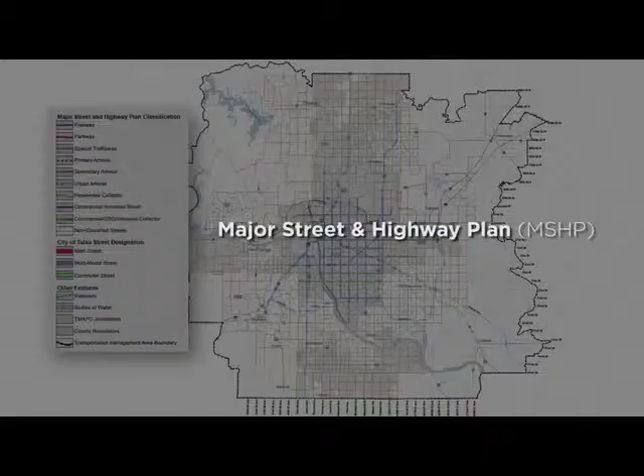Tulsa's current project development process formally begins with a project being identified and funded. Once funded, the design process is fairly straightforward, where design phases follow a 30, 60, 90, and 100% completion. The major street and highway plan establishes the street hierarchy and associated possible cross-sections, with right-of-ways indicated. Tulsa has developed a new project development process that bridges the gap between long-range planning and final engineering. The Complete Streets Procedural Manual provides the city with the needed tools and procedures to make this transition seamless.

Historically, transportation infrastructure has been designed, funded, and maintained to react to existing congestion by adding capacity. Experience across the country has shown the shortcomings of this approach, which relies on taxes and bonds to fund the infrastructure required by projected travel demands.

Changing this approach is at the core of infrastructure reform initiatives at the national and local level. In short, the public sector can no longer depend on consistently raising the substantial funds required to build its way out of the present, let alone future congestion. Building better roads along with real alternatives to driving can change the problematic patterns that impair communities' quality of life. Congestion is just the most visible symptom of the underlying problems.

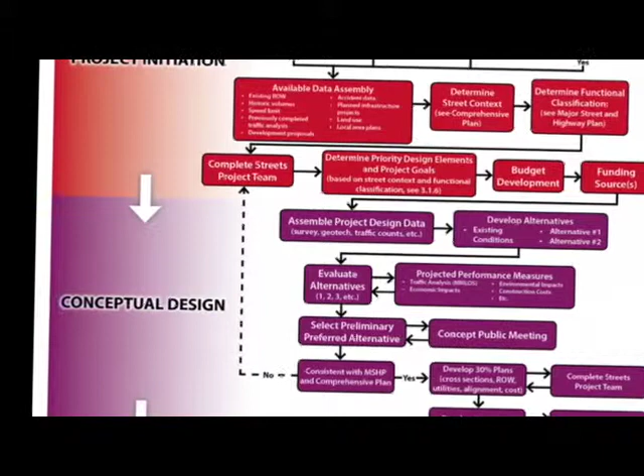The updated Complete Streets design and implementation process is outlined in Chapter 3 of the CS Procedural Manual. A useful flowchart graphic, Figure 3.1, has been provided that walks through the many necessary steps to achieve the most desired result. This graphic illustrates the process starting with a proposed project at the project initiation stage, culminating with the coordination of a multidisciplinary project team.

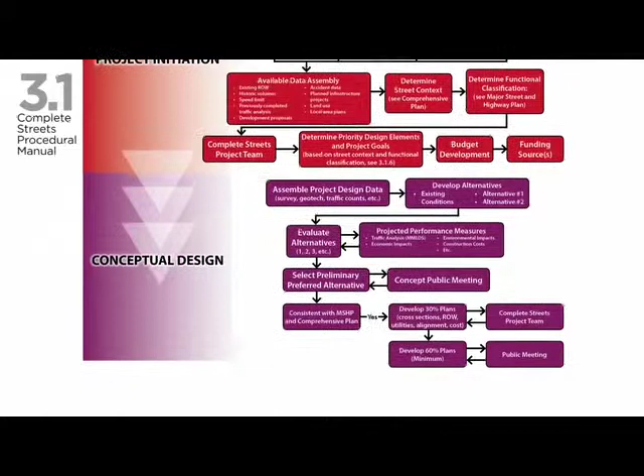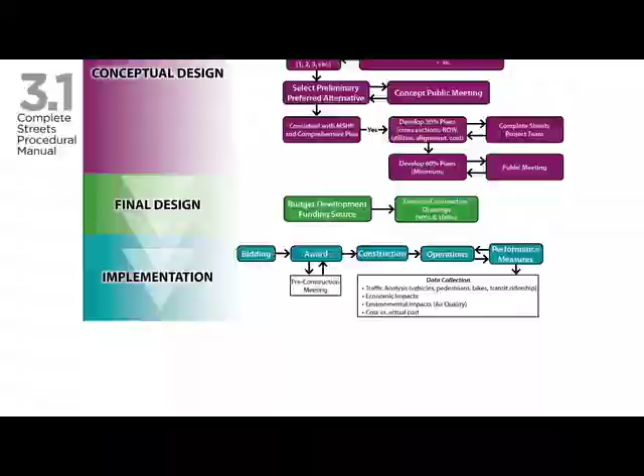Street design alternatives are developed and evaluated during the conceptual design phase, and with proper public input, this leads to a final design phase. With funding and complete construction plans in place, the process moves to the implementation stage. After the implementation of a complete street design, performance measures are used to provide further evaluation.

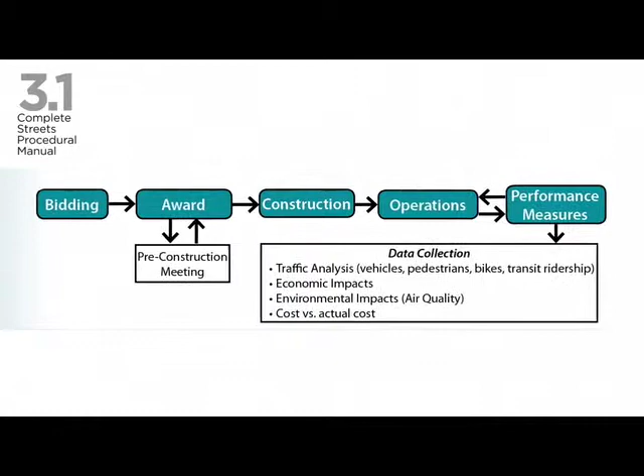The first step is the project initiation stage. Complete streets projects arise in two basic ways, either initiated because of needed street work or initiated by private development projects. A project should first be identified as either a utility-related project, a private development project, a capital project, or a minor maintenance project. While there are similarities in how these projects are conducted, the initiation and planning processes are different.

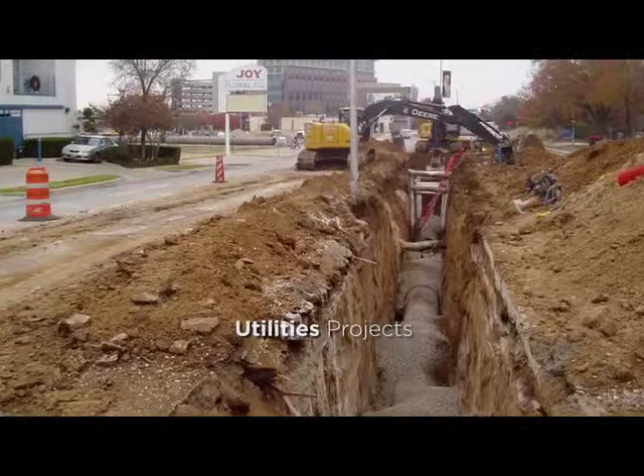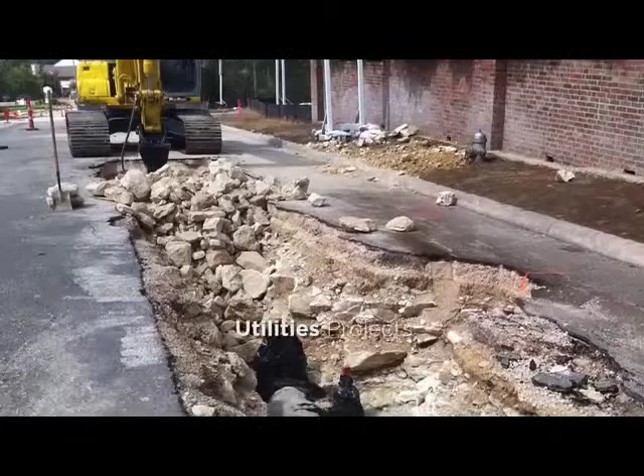For instance, a utility-related project initiated to replace water, sewer, or utility lines may be considered as an opportunity to introduce complete streets elements if the project length is significant. A 30-foot-long mid-block replacement of a water valve would not be a viable candidate, but a 3-block-long sanitary sewer line replacement would likely create a positive opportunity to add complete streets elements.

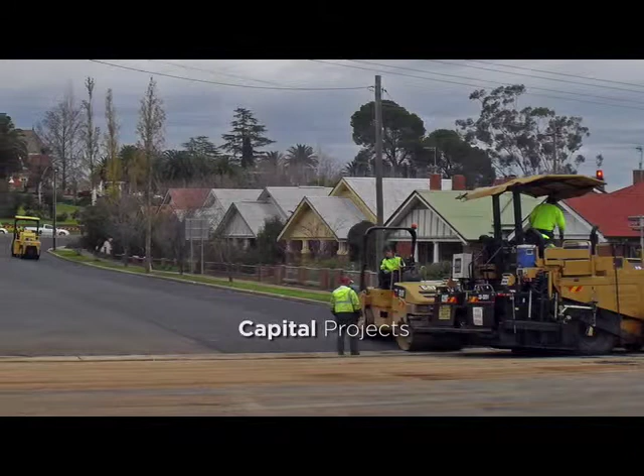In the case of private development projects, whoever initiates and sponsors a complete street project determines the initial review and approval process by the City of Tulsa. Some projects may have matching funds from state, federal, or local sources, while others are funded 100% by the private sector. Capital projects are roadway and reconstruction projects that are typically placed on the city's capital improvement plan. The scope of these projects is usually large enough to allow for consideration of planning and potential implementation of complete streets elements.

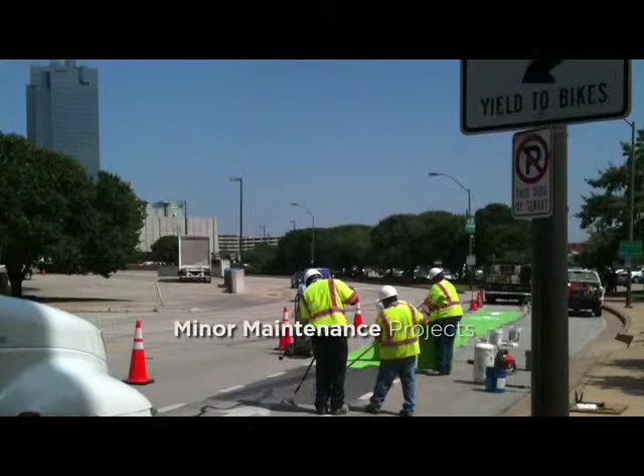Finally, minor maintenance projects such as restriping or resurfacing roadways should be evaluated as opportunities to introduce certain complete streets elements. Since these maintenance plans can be sporadic based on roadway conditions, they may not be appropriate for full complete streets projects, but can still be instances to introduce planned bike facilities or new multimodal features.

After determining the type of project, all available data should be assembled to best inform the street design process. This should include both traditional thoroughfare data as well as information about the contextual environment. Designers of complete streets must balance roadway characteristics, the context and land use of an area, priority design elements, and the construction, operation, and maintenance costs associated with the improvements.

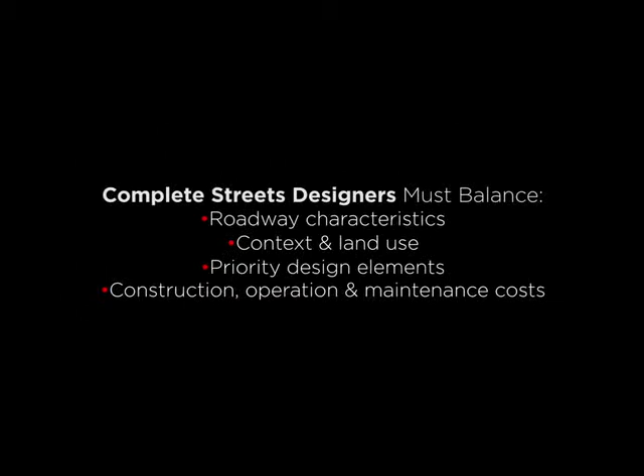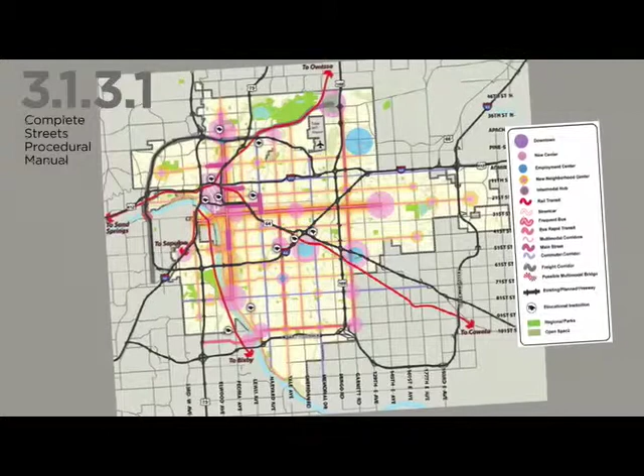The street context can be determined by referring to the comprehensive plan vision map as well as evaluating local area plans, existing land uses, existing zoning, and development proposals. The vision map is provided in Figure 3.1.3.1 in the manual. The Major Streets and Highway Plan, the MSHP, should be used to define the correct functional classification. The most current MSHP can be found on the INCOG website.

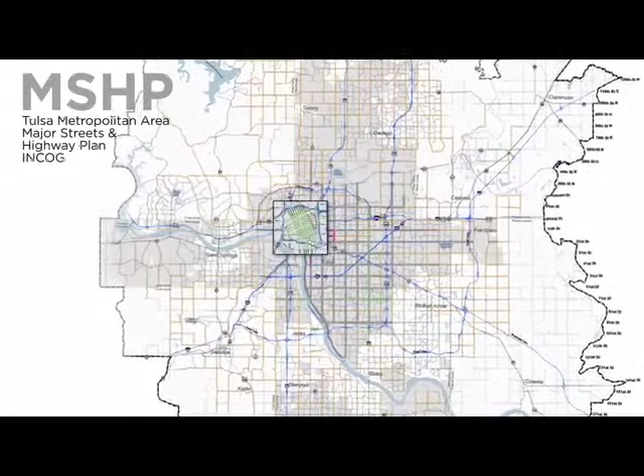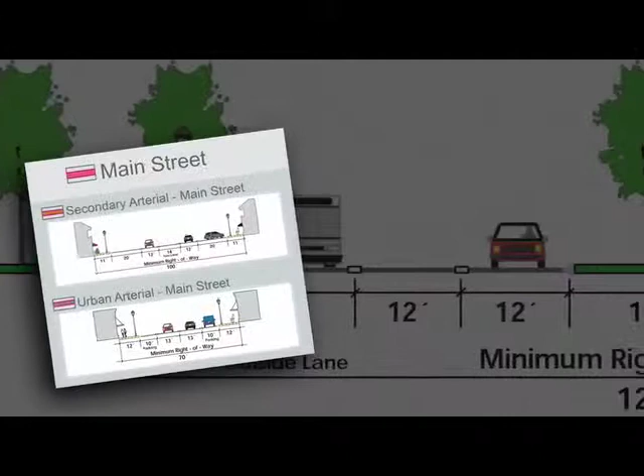The City of Tulsa has worked with INCOG to integrate the street design concepts from the comprehensive plan into the Major Streets and Highway Plan and has designated a series of context street types into their adopted plan: main streets, multimodal streets, and commuter streets. Each street designation implies an overarching vision and character that should be considered when planning specific projects.

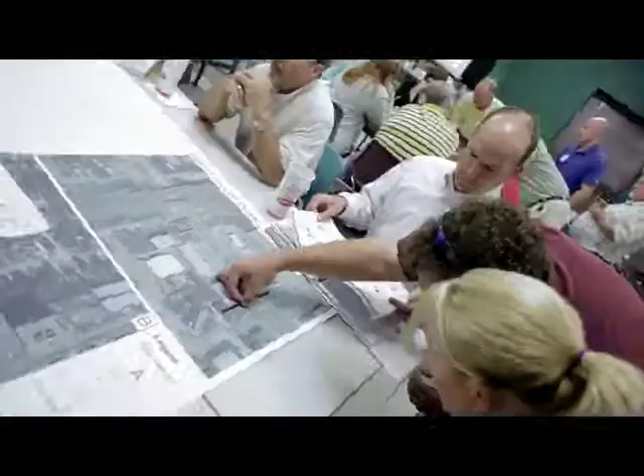A coordination kickoff meeting is necessary to establish the scope of each complete street project and to form a project team involving all appropriate departments early in the project development process. This meeting will be an opportunity to present all team members the street context, functional classification, and initial data, as well as determine project goals and priority design elements.

The design guidance of the CS Manual provides options for street designs in the form of best practices of geometric and furnishing treatments, but in most cases it does not prescribe which specific treatments must be used in which combination.

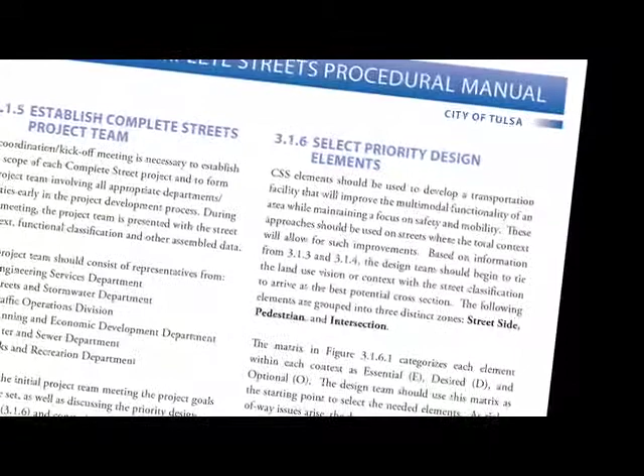It also does not dictate which treatment should receive priority when there is a conflict between design alternatives. Rather, it gives users the flexibility to determine which overall design is most appropriate and practical in light of the goals and priorities established through the planning process and the overall policies of the manual.

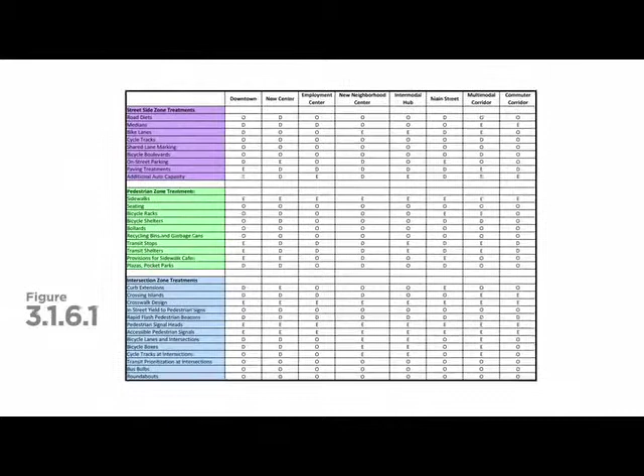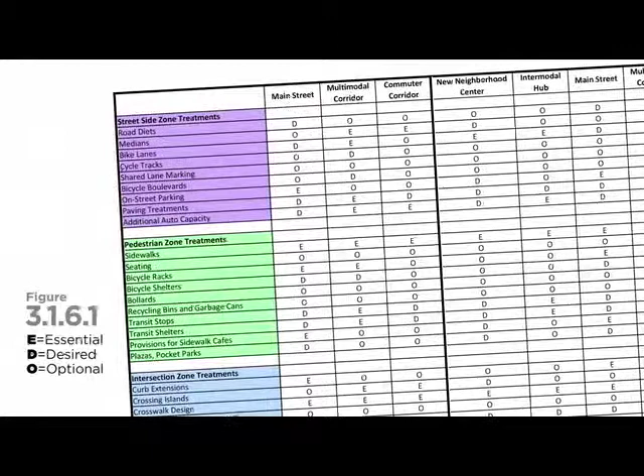A matrix is provided in the CS manual to assist in guiding the selection of each element based on street context. These elements are grouped into three distinct zones: street side, pedestrian, and intersection. The matrix in Figure 3.1.6.1 categorizes each design element within each context as either essential, desired, or optional. The design team should use this matrix as the starting point to select the needed elements. For example, medians and crossing islands are considered essential for a multimodal corridor, but are optional elements for a main street. Further guidance on specific design elements is provided in Appendix A.

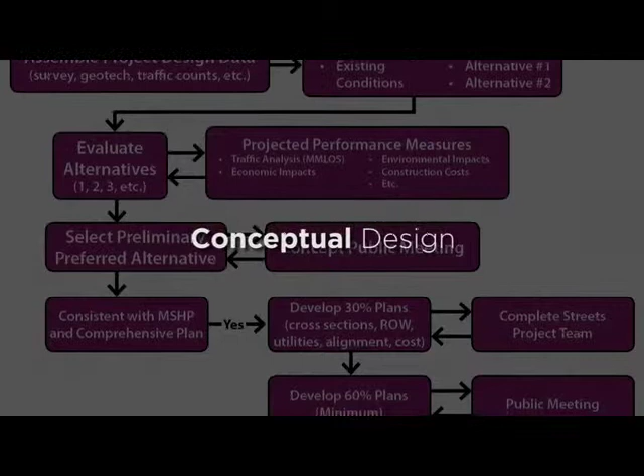Once the priority elements have been chosen, the process leads to conceptually detailing the thoroughfare design. As with any design process, this stage is iterative, can involve several options, and can result in potential updates to the thoroughfare plan and cross-sections.

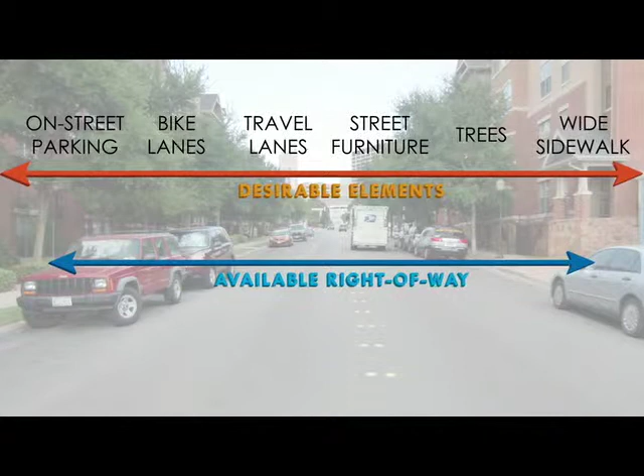First, identify available right-of-way and other constraints such as utilities, physical terrain, and access. In existing areas, an initial cross-section of the desirable street side and intersection elements is prepared and compared with the available right-of-way. If the total width of desirable design elements exceeds the right-of-way, determine the feasibility of acquiring the necessary right-of-way or eliminating or reducing non-vital elements. The design of the street side and pedestrian zones should then be completed based on the thoroughfare type and an understanding of the adjacent context characteristics.

The art of thoroughfare design is balancing the desired design elements of the thoroughfare with right-of-way constraints. Higher priority design elements are those that help the thoroughfare meet the vision and context-sensitive objectives of the community. When the width of the right-of-way varies or is constrained, it is useful to prioritize design elements and develop a series of cross-section options accommodating all or many of the higher priority elements.

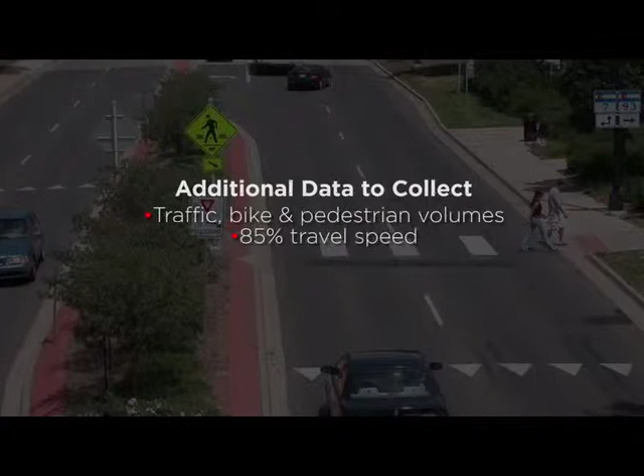Prior to conceptual design, additional data should be collected including current traffic, bike, pedestrian volumes, 85th percentile travel speed, survey including right-of-way occupants, and geotechnical analysis. Performance measures will help the design team evaluate the alternatives and project the effectiveness of the design elements in achieving the preferred results. Traditionally, vehicular level of service, a measure of traffic congestion, has been used for transportation planning for widening projects. However, Complete Streets project evaluation requires addressing how an alternative will serve all users.

Measures that can be used to evaluate alternatives and project performance include multimodal level of service analysis, economic impacts, and environmental impacts. MMLOS is a method for assessing how well an urban street serves the needs of all users: auto drivers, transit passengers, bicycle riders, and pedestrians. The result of the analysis is a perceived degree of satisfaction for each of the four users based on three basic travel movements: travel along the street segment between two signalized intersections, travel through the downstream intersection of that segment, and travel crossing the street.

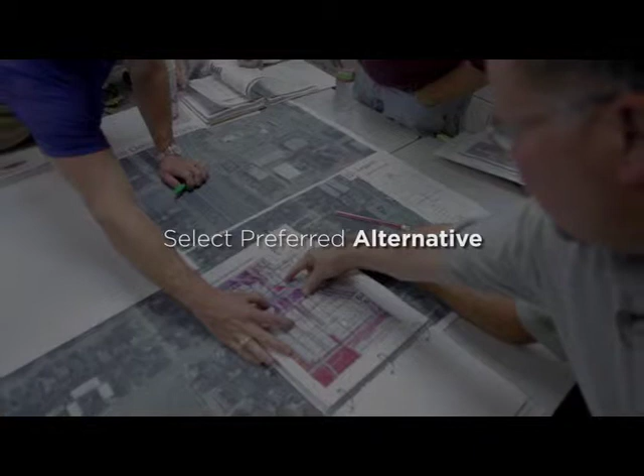The CS manual provides guidance for prioritizing design decisions for each road user based on the various street types. All of the developed alternatives are analyzed by the Complete Streets project team, comparing the various measures of performance. A selected preferred alternative can proceed to the final design stage if it is consistent with the MSHP and the comprehensive plan vision and does not have the additional requirements from federal funding inputs. The selected alternative is then further refined and given to the project team for final review.

If a desired alternative does not match the comprehensive plan and MSHP or has federal funding, a conceptual design should proceed to a concept public meeting for further review. If the selected alternative is consistent with the MSHP and the comprehensive plan, then the consultant can proceed with the design. At the 30% level, a review by the Complete Streets project team is scheduled. At the 60% level, a public meeting is scheduled to receive comments on the design and make any necessary modifications based on input from stakeholders.

The final design stage of the process includes developing the project budget, determining the appropriate funding source, and developing complete construction drawings. Prior to construction, city staff should take into account construction phasing to minimize disruption of businesses and residents and maintain safe travel in the construction zone. Certain times of the year may prove better for construction than others.

The project team should refer to the design checklist provided by city staff. Project plans are submitted at the 90% level for final review, and then final plans are submitted at the 100% level.

Well-functioning, high-quality streets are not just a product of their planning and design. The way a street is operated and managed once built is just as important as its design. For example, curbside regulations and traffic controls, signs, signals, and markings are a central factor in determining how streets operate and the quality of the public realm.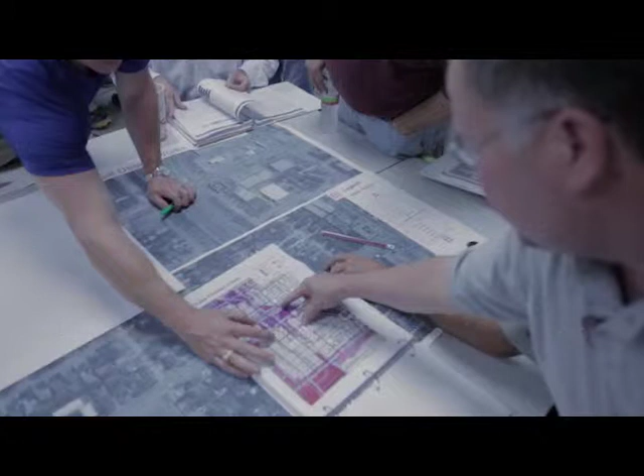The project team should stay involved throughout the implementation stage, including bidding, construction, and inspection. Once the contractor is selected, a pre-construction meeting is an important element. During the pre-construction meeting, the design elements of the project should be clarified to the contractor. Having trained inspectors available on site is critical for a complete street project to answer questions of the public and contractor.

Collecting data after project implementation is important in validating the Complete Streets program and confirming the anticipated benefits were realized. Projected cost versus actual cost and before and after level of service determinations can be made. Economic benefits need to be measured over a much longer time period.

Proper operations and maintenance of a facility is critical to the long-term success of a street design. Elements that should be considered to ensure the desired functionality of a street include traffic controls, limitation of vehicle access, regulation of curbside activity, cleaning, and enforcement.

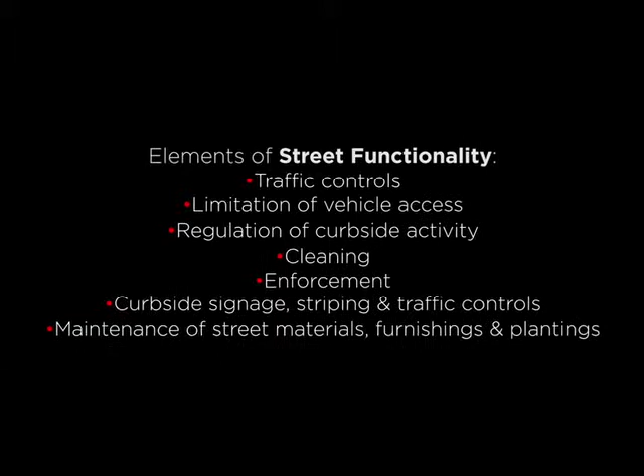Curbside signage, striping, and traffic controls are central in determining how streets operate and the quality of the street design. Maintenance of street materials, furnishings, and plantings is critical to long-term success of complete street designs. Elements to be considered are listed in Section 3.4.3.

MMLOS is a method for assessing how well an urban street serves the needs of all users. The MMLOS analysis methodology most commonly used is based on research sponsored by the Transportation Research Board through NCHRP Project 3-70, Multimodal Level of Service Analysis for Urban Streets.

MMLOS is designed for evaluating complete streets, context-sensitive design alternatives, and smart growth from the perspective of all users of the street. It uses quality of service as an indicator of the traveling public's perceived degree of satisfaction with the traveling experience provided by the urban street under prevailing demand and operating conditions.

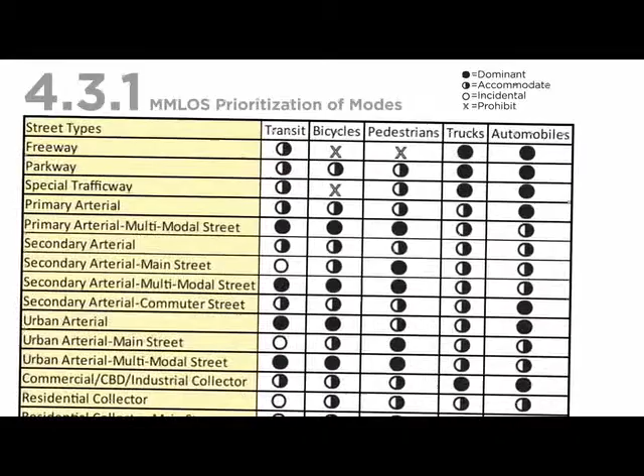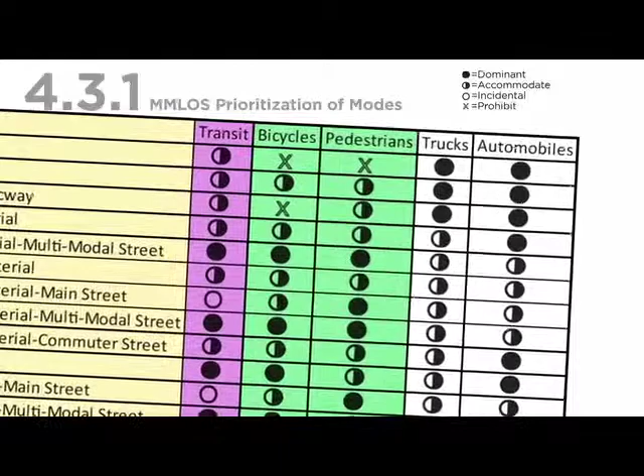Figure 4.3.1 provides guidance on how the various transportation modes should be prioritized within the street types identified in the MSHP. For example, a multimodal primary arterial should include transit, bicycles, and pedestrians in the street design at the highest priority, while also accommodating automobiles and trucks.

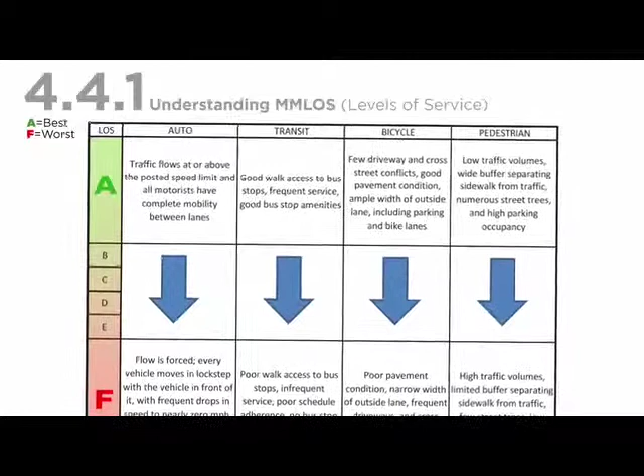Multimodal level of service scoring can be used as performance measures both during the design stage as well as part of the ongoing evaluation of the street after construction. Figure 4.4.1 assigns definitions to the different levels of service, LOS, A through F, for the various travel modes. Multimodal LOS A is best, while multimodal LOS F is the worst.

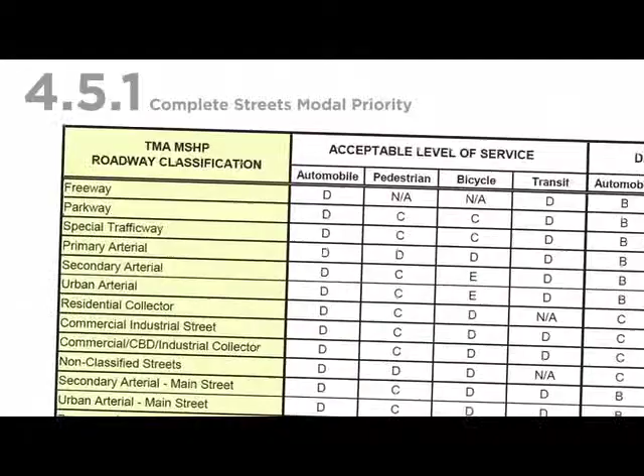A chart detailing MMLOS modal priority is provided in Figure 4.5.1. Further guidance on evaluating the functionality of a mix of transportation modes is provided. Acceptable and desirable levels of service are presented for each type of roadway classification in the MSHP. These performance measures should be used to determine reasonable accommodation for each travel mode.

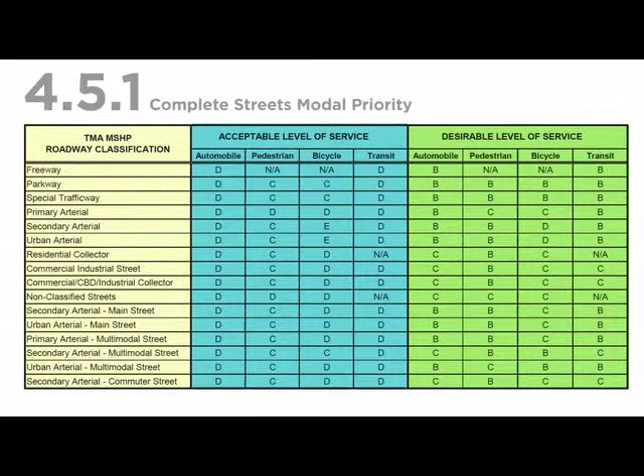Modal performance of existing and planned roadway sections should be evaluated and compared to these predefined performance measures to determine effectiveness of improvements. Not all roadways in Tulsa should be expected to rate at LOS A or B. Ratings of C, D, and E may be considered acceptable in some urban settings. Higher LOS ratings would be desirable in locations with high multimodal activity.

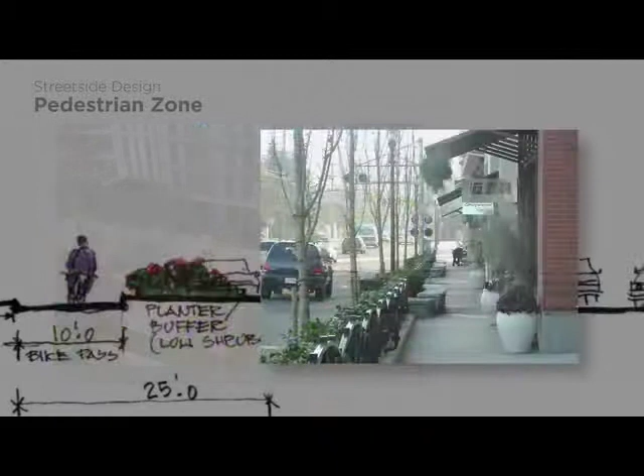One element of a roadway cross-section that is sometimes underdeveloped is the street side design, also known as the pedestrian zone. When looking at the cross-section of a walkable community, the street side design is a critical part of design that fosters a pedestrian-friendly environment. The role of a street side is to promote pedestrian amenities that encourage growth in a walkable environment that is consistent with the context type.

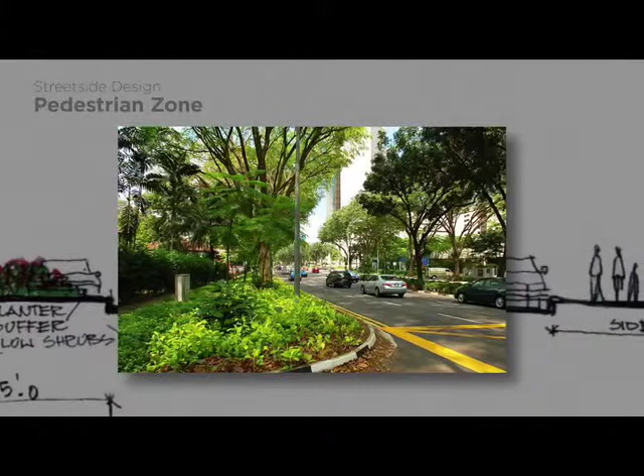Street side design is interdependent with the context type of the surrounding area and other characteristics like the landscaping and the street side furnishings. When looking at both the context and the street side design, public right-of-way contains a great opportunity for advancement in walkability and community in key areas. This section will address the different approaches to maximize the context potential of the street side area for pedestrians by looking at the key aspects of a street side.

The edge zone represents the area that is between the curb and the furnishing zone. This area serves many purposes for many configurations. If there is on-street parking, this zone either serves as an area to open vehicle doors, if vehicles are parallel parked, or as vehicle overhang if parking is not parallel to the curb. This area also serves as a place for parking meters and a place to access public transit.

This zone is not primarily used unless for accessing a personal vehicle or public transit. The edge zone serves a purpose as a setback for the furnishing zone and also for pedestrians to transition to transit or to their motor vehicle. Transit shelters and other transit amenities may also be located within this zone.

This zone also serves as a buffer for pedestrians to increase both the tangible safety and the perceived safety to pedestrians. This area can also be used for public and private features. Public features that may be used in the furnishing zone are benches, planters, drinking fountains, and trash cans.

With proper license agreements, this area can also be used for street vendors, or in some cases, seating for a local restaurant. When done correctly in the right context, a furnishing zone can greatly increase the lure, walkability, and safety to pedestrians along a corridor.

The throughway is located between the furnishing zone and the frontage zone. This zone serves as the travel lane, so to speak, for pedestrians. This zone is allocated strictly for pedestrian use and should be clear of obstructions that could impair accessibility for pedestrians. The frontage zone serves as a buffer between the building front, if there's not a setback, and the walkable area, the throughway, of the street side.

With proper license agreements, the frontage zone can serve as an area for storefronts to advertise on the street, or an area for restaurants or other shops to utilize for seating. When properly executed, there is adequate room for shops to use the space without introducing crowding or interfering with the walkability of a thoroughfare.

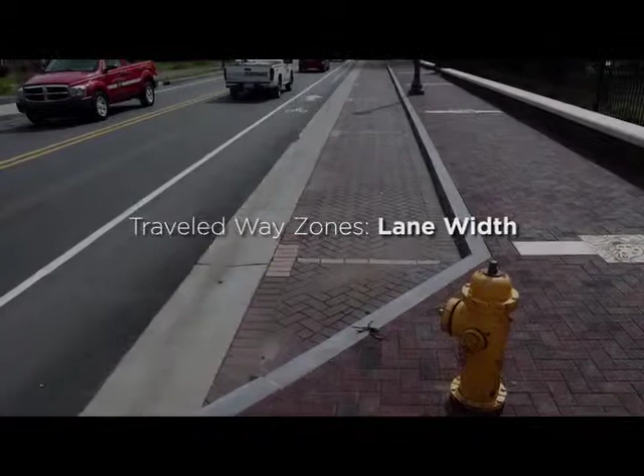Now, lane width is an important aspect of design, and it creates the balance between pedestrian, bicycle, and motorist-friendly thoroughfares. In general, wider lanes are more suitable for motorists due to higher vehicle speeds and wider interchanges. Lane width design is contingent on many considerations. Width of emergency vehicles and transit buses are considered when establishing lane width.

If different lane widths are to be used for multi-lane roads, the wider lanes should be the outermost lanes to encourage road sharing with bicycles. Keeping right-of-way in mind is important for design as well. Lane width is a balancing act with the available right-of-way because there are many other aspects like the street side and median that also need to be addressed within the right-of-way constraints.

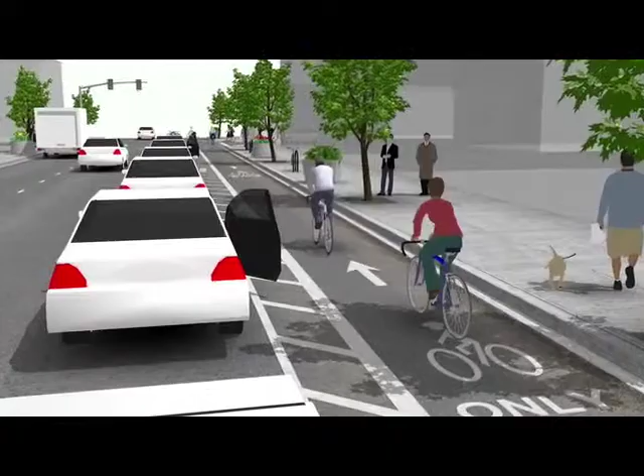Bicycle lanes can affect lane widths as well as on-street parking. Both aspects increase the near side lane to account for door swing and bicyclists sharing the traveled way. Medians create a great opportunity for pedestrian facilities. One opportunity is to create mid-block pedestrian crossings.

The mid-block crossing serves as a delineated location for pedestrians to cross the road in areas with long blocks from crosswalk to crosswalk, or if there's a heavy pedestrian feature that needs quick access across the road. They can have a great impact on pedestrian safety by providing a safe crossing area between major intersections.

A bicycle lane is a portion of the roadway that has been designated by striping, signing, and/or pavement markings for the preferential use of bicyclists. Bicycle lanes include a bicycle pavement marking with an arrow to indicate bicyclists should ride in the same direction as adjacent motor vehicle traffic. These facilities are typically recommended for arterial roadways, streets with channelization.

Shared lane markings are pavement markings that are placed within the vehicular travel lane of the roadway. Unlike bicycle lanes, they do not designate a particular part of the roadway for the exclusive use of bicyclists. Shared lane markings indicate the location bicyclists may operate within the travel lane. On-street parking has many benefits and challenges that help the overall design of a thoroughfare.

On-street parking provides an area for loading and unloading of cars and trucks, which can stimulate sales at commercial retail uses from foot traffic due to the ease of access for motorists. On-street parking is an appropriate option for increasing walkability and access, but there are also trade-offs to using on-street parking.

On-street parking decreases the available right-of-way for other facilities. This means that sacrifices like bicycle lanes, motorist lanes, and pedestrian accommodations may be decreased to make room for on-street parking. One solution when bicycle lanes or shared lanes are present is to use parallel parking or back-in angle parking. This decreases the blind spot between motorist and bicyclist. On-street parking uses right-of-way that could be used for widening pedestrian facilities or widening roadways.

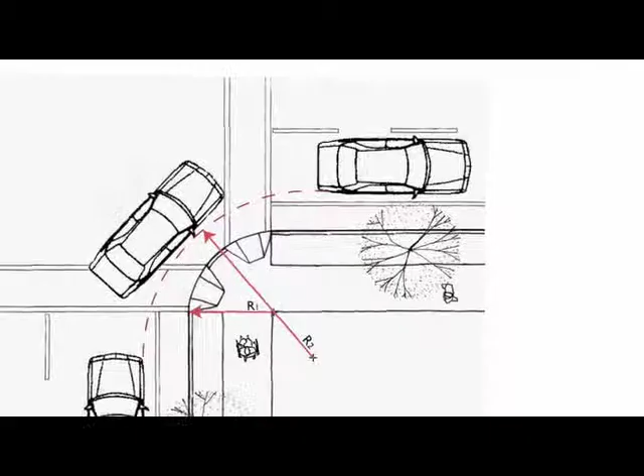The curb radii are used as a barrier between pedestrians and motorists at intersections. The curb return radius plays a large role in the length of a crosswalk, leading to the overall walkability of an intersection. In general, the larger the curb return radii, the longer the crosswalks are for pedestrians. On the other hand, a larger curb return creates a more motorist-friendly environment with higher turning speeds and ease of use that can accommodate larger design vehicles. The curb radius is a trade-off between motorist functionality and walkability at an intersection.

To create a more multimodal thoroughfare in urban areas, it is encouraged to decrease the curb return radii at intersections. Using a smaller radius creates shorter crosswalk lengths, improved visibility between motorists and pedestrians, decreased severity of crashes, and a more accessible route for disabled persons.

Curb extensions serve to decrease the road right-of-way at intersections to increase pedestrian safety for many reasons. The most appropriate location for curb extensions are in high pedestrian urban areas. Curb extensions should also be used in accordance with on-street parking, especially diagonal, and cannot be used with an exclusive right turn lane. In areas with bicycle lanes, the curb extensions should not extend past the width of the bicycle lane.

With the vision for Tulsa in place, supported by guidance from the Complete Streets Procedural Manual, all Tulsans can look forward to a future transportation system that appropriately adapts to the changing urban environment and needs of all roadway users. In developing this manual, some important lessons have been identified that should be considered during the implementation of future Complete Streets projects. For one, it's important to maintain strong interdepartmental and city consultant relationships through the design and construction process.